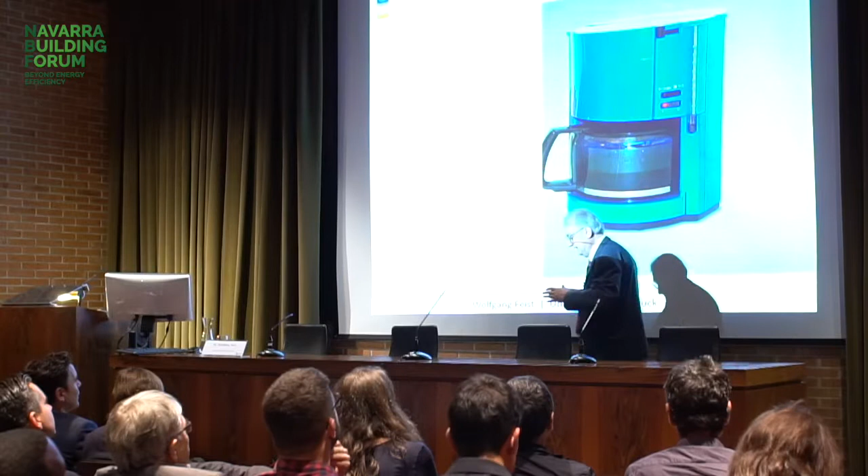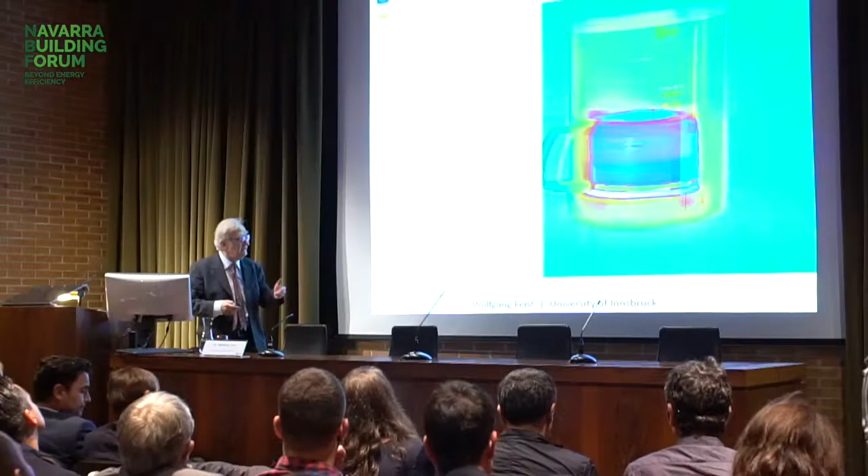Well, if you just have a can of coffee and you place it at some place, it doesn't stay hot very long. It will lose heat. So then there was a clever engineer, of course, who said, well, if we just replenish the heat which is lost, we can keep the coffee hot. And that's a typical engineering solution for that. And this is what you see if you look at that can in infrared light. So you see all these losses, and you also see that we have energy in the form of heat supplied to the pot so that it's kept hot.

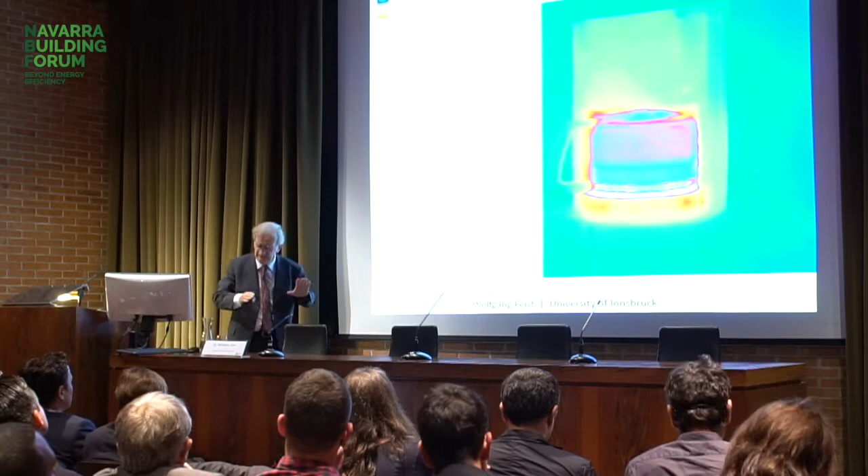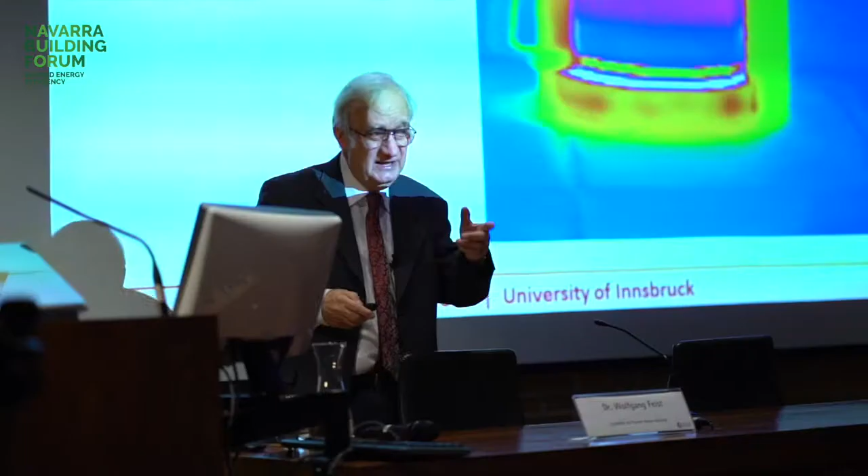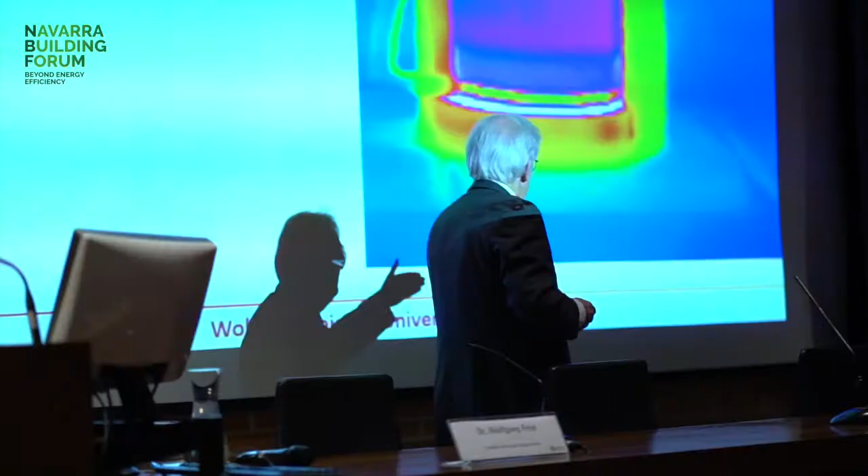Now that's a typical way we do our energy business almost everywhere. My original profession is physics, so we analyzed at a certain point the energy use in our society, and I can tell you about 98% of the energy use in our society is of this kind. And there is a way to do it completely without losing a lot of energy, and you all know about that. That's the passive way.

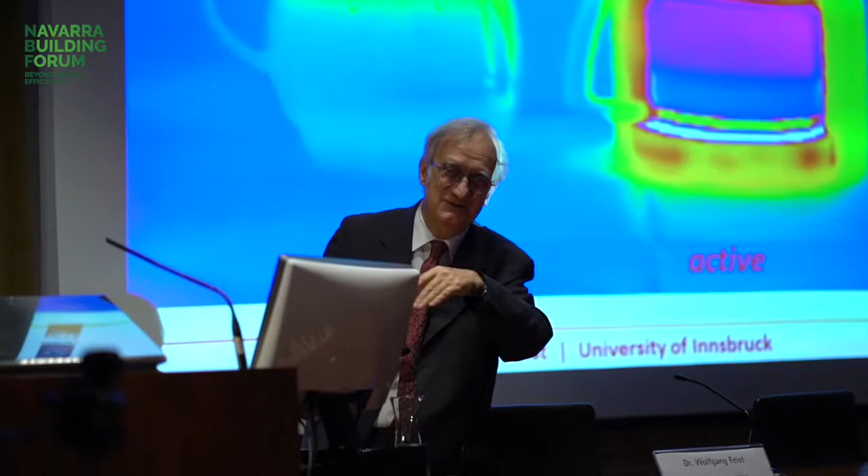You fill the coffee into the thermos bottle, and it will be hot for 6 hours, 8 hours, 10 hours. It's a good thermos bottle, and you don't need any energy to keep it hot. So in order to keep something hot, you don't need to add energy all the time. You only need to add that amount of energy which is lost by the system. That's simple physics. And the same thing applies vice versa for cooling. You can think about it, I won't go into details right now. So that is the basic background explaining what a passive house is. It's a solution for the energy service heating or cooling without a need to spend a lot of energy.

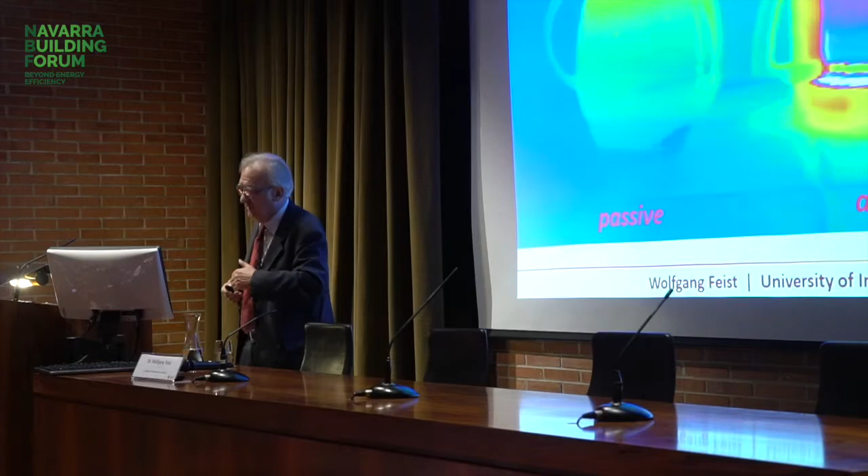Now, from a viewpoint of physics, you can improve the efficiency as much as you want. You really could improve it so that at the end you won't need almost any energy to heat the building. But at that point it's also an economic question. Some winters are a little bit colder and others are not that cold. So you would have to construct the building for the very coldest winter, and maybe it's only 1 hour every 10 years where this very high efficiency would be needed. From a point of economy, that wouldn't be a good idea.

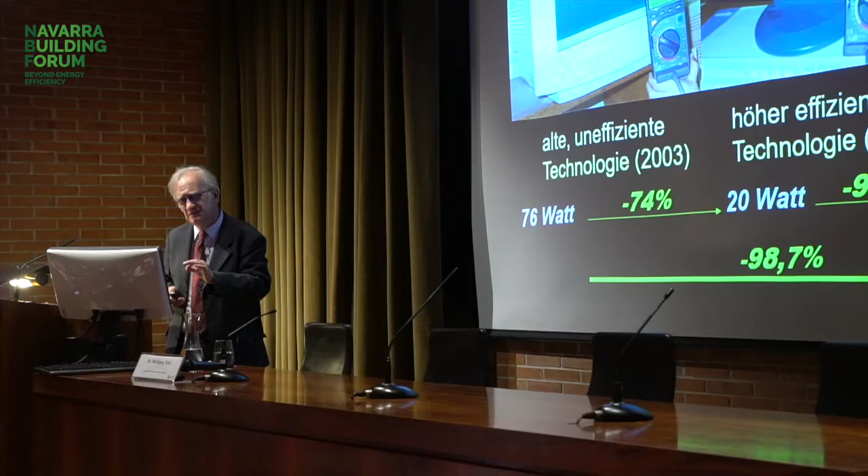Because we have some energy available, I will talk about that later also. So it's always a question how far we want to go with these passive measures. But it's not the only part. I already told you that 98% of the energy use we have is of this kind. And then you might get very skeptical and say, oh, is that true? Well, let me just tell you another example. We would have to do it example by example, but let's just look at this example.

How many of you still remember this CRT monitor? Have used it in their lab or whatever? That's not so many, because a lot of young people are also here who have never known about this. So this consumes about 76 watts, that is the measurement here, in order to have a decent display available.

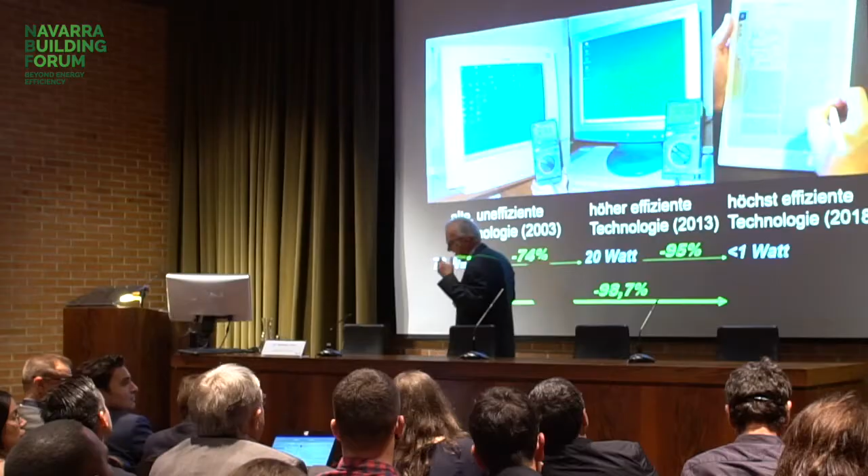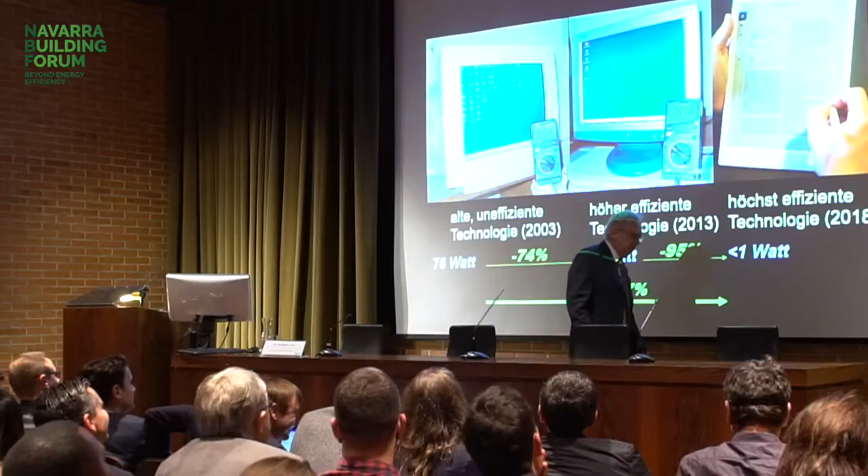And at the time, it's not so far ago, 2003, I discussed it with the engineers in that industry. They were to improve the energy efficiency of these monitors. And then they told me, oh, well, this is not possible. It's impossible because of the laws of physics. Now, I'm a physicist. I know about the laws of physics. From the laws of physics, almost nothing is impossible besides going faster than the speed of light. But a lot of other things, they are not impossible. But they have good reasons to say.

They say, well, the electron beam, which is used to write on that screen, has a kinetic energy, and it's not worth it to recover the kinetic energy of that beam. And that's clear. That's one of the reasons why you have this very high amount of energy being delivered to that monitor. And that was also the reason why, do you remember, these things got really hot. So they were heating your office all the time, also in summer when you didn't need it. So that is why this is old, inefficient technology, which is not used any longer.

Or is anybody still using CRT monitors? Interesting. Interestingly, this is what the guy didn't believe me. We had the better efficient technology.

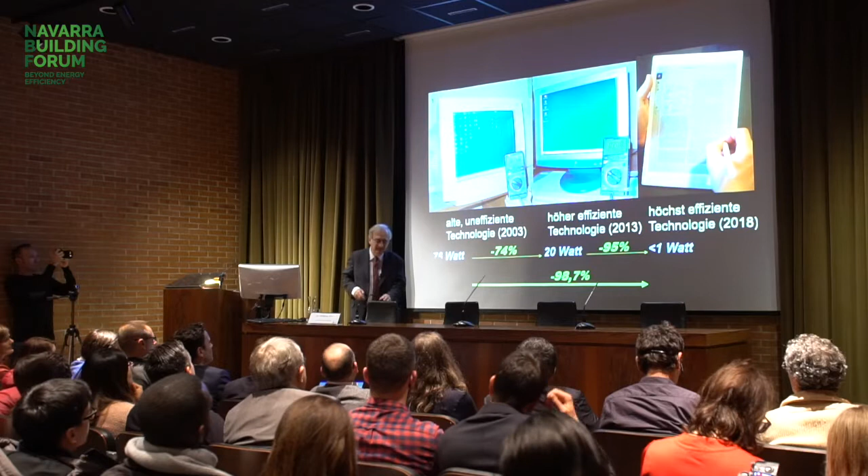Nowadays, almost everywhere, we have these LCD displays, which are based on a completely different way of displaying what you want to see on the screen. And the energy you need here is just 20 watts. So that's a reduction of 74%. Did you know that? It's quite a high reduction. It's only 1/4 of the energy these kinds of monitors use compared to the old ones. But let me tell you, it's still much too much. Still much too much. How much energy do we need to run this display?

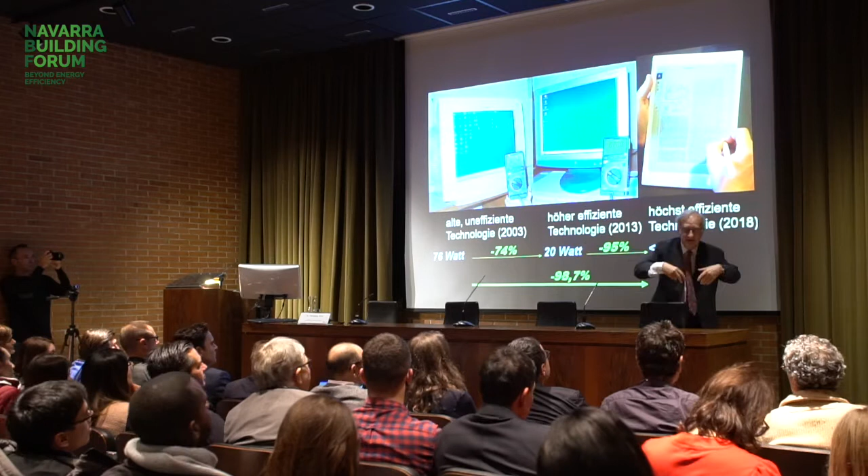Zero. It's like the thermos model. You don't need any extra energy besides the light coming to that display in order to display something. Now, some people say, well, that's not possible because we want to have moving pictures like a movie or video. It's possible. And you see, it is an already available technology, and some of you might already have that kind of technology. It's called electronic ink or electronic paper. And it doesn't consume any energy to have that display. It consumes a little bit for changing the display, but it's measurable. It's a range of less than 1 watt. It's available, it's possible to do that. And from a point of physics, it's no problem.

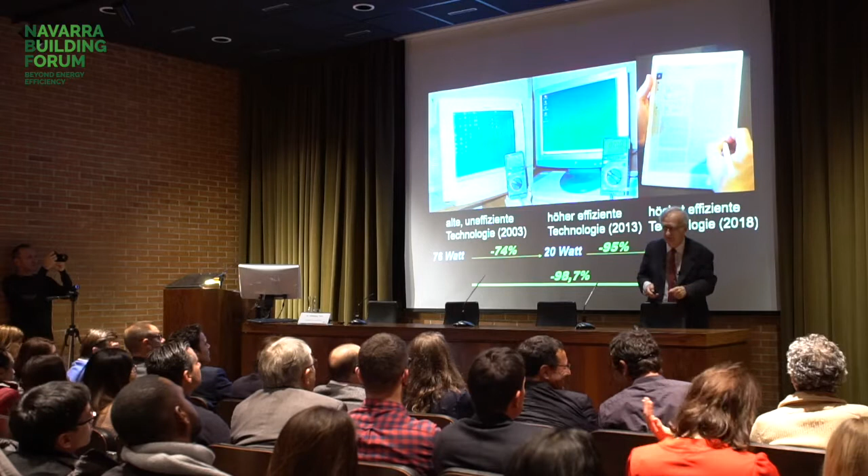So now, why aren't we using these kinds of monitors everywhere? That's a question I want to give you. Maybe we come back to that later on. And I promise you, it will be not so far in the future, we will be using these kinds of monitors almost everywhere. So that's again showing you the question of providing energy services, displaying something on the screen. For these kinds of energy services, from the very nature of the energy service, you don't need energy to provide that service. Or to put it another way, the amount of energy you need can be very, very low, extremely low. And that's all about this development of increasing energy efficiency.

We have it also with cars. That's an example of a very energy efficient car. Maybe some of you remember, that was 2002, it's quite far ago. It's a car which consumed only 1/5 of the energy which a normal conventional car consumes. And it's interesting, it was VW who built that car, but they didn't decide to bring it to the market. It's quite interesting. Why didn't they decide to do that? Maybe they wouldn't be in such trouble as they are right now if they had made that decision. That's another question again. So, yes, we have these technologies available, and sometimes there's a question, why don't we use them?

Well, in the case of buildings, we have been doing this. It's also a question why. Well, the answer is quite simple. That is because in the building industry, there are a lot of small and medium enterprises, well, also big ones, but a lot of small and medium enterprises. And you always find somebody who will help you to realize such a thing.

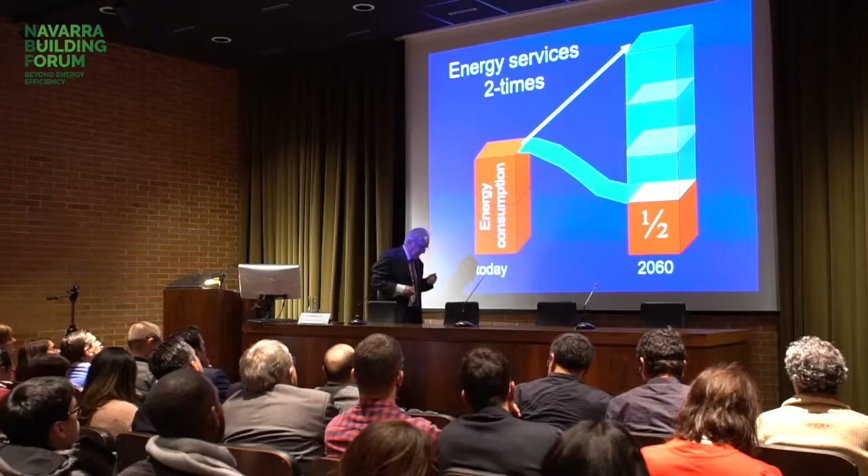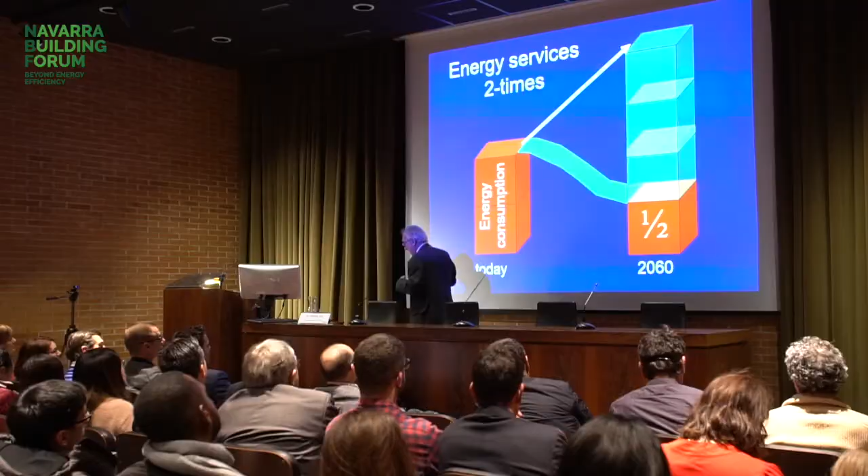Now there's a question we might discuss later on: if that was going on all the time, why did we still consume more and more energy? We'll come back to that later. So the basic idea for the solution of the energy crisis we are in right now is that we improve efficiency by at least a factor 4. This is a famous book by my colleague Ernst Ulrich von Weizsäcker. I would recommend, if you haven't yet, reading that book called Factor 4, or the latest edition, Factor 5. We reduce the amount of energy we need for the same energy service by a factor 4 or 5. So this is what is maybe needed for the world.

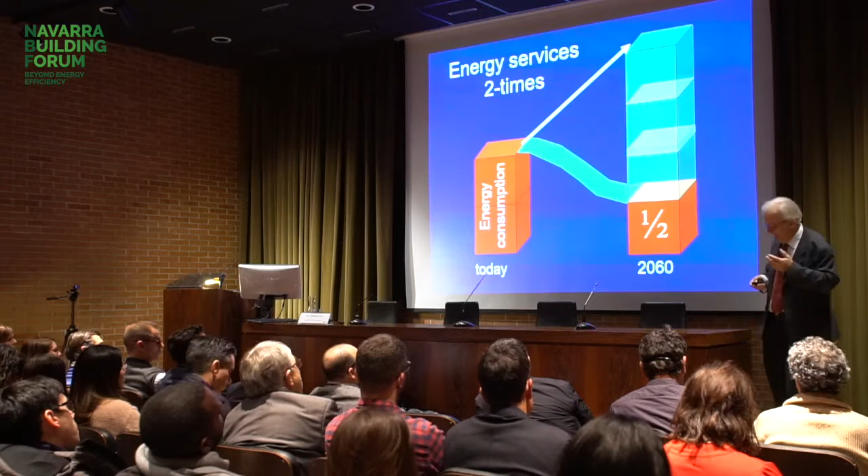We come back to that later on. But at the end, if we improve the efficiency by that factor of 4 or 5, the total amount of energy we need will only be half of what we need now. And that can easily be provided by a sustainable way of energy generation. So that's the main idea behind that whole process.

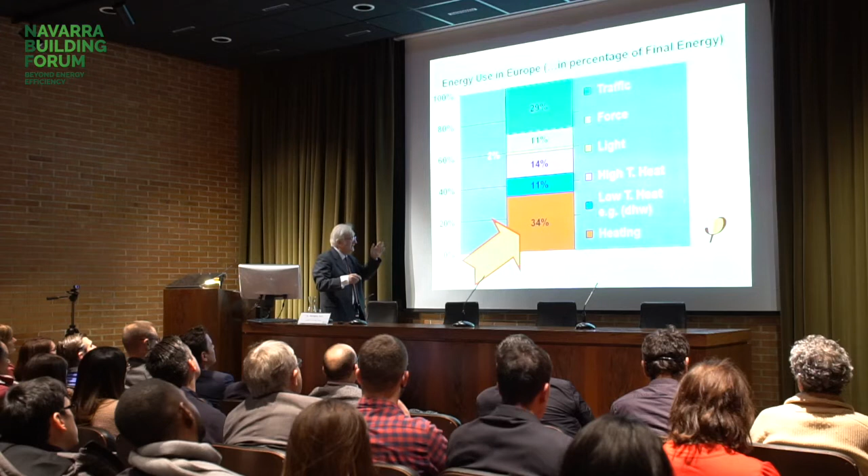Now the buildings are quite important in that, and that's another thing which is not so well known. In the countries of the European Union, about 1/3 of the total energy consumed is consumed by heating of buildings. Well, the light isn't that much. Traffic is also quite high. Maybe this slide is 3 or 4 years old.

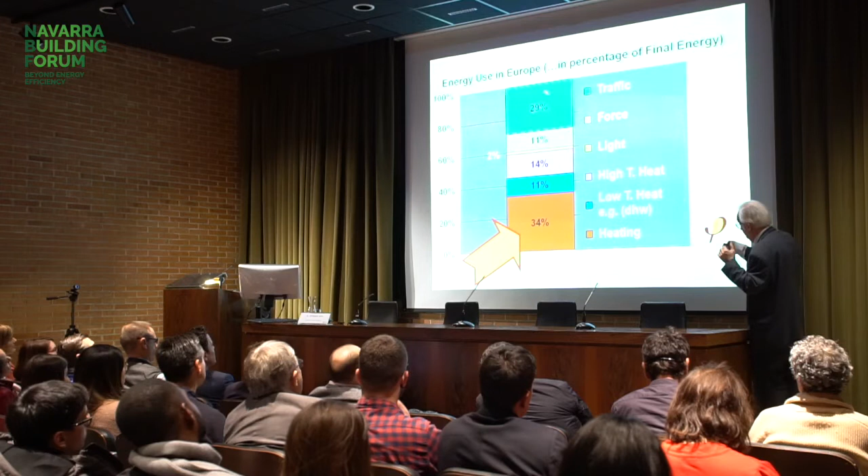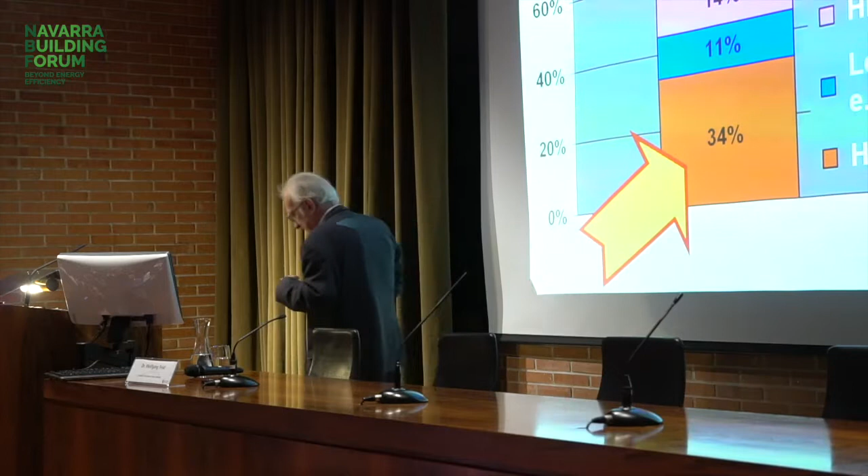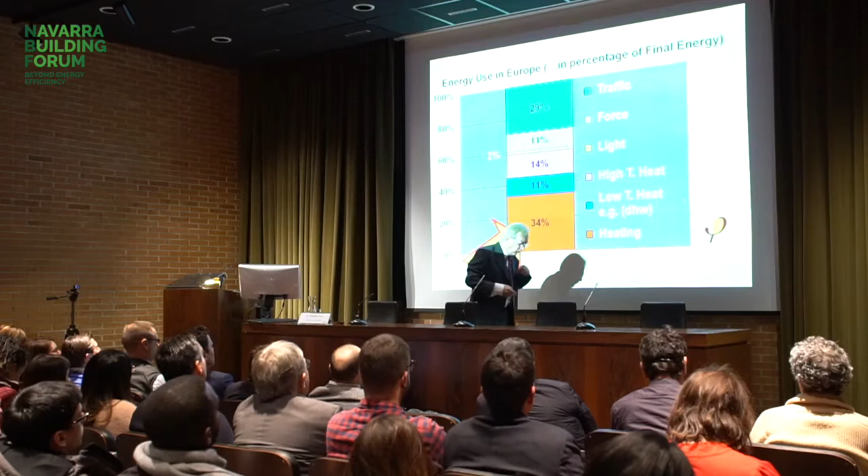Maybe now the traffic has grown into the same amount, and maybe the heating is already a little bit declined because we are quite successful in reducing that heating energy demand. But if you break down the energy consumption in the European Union, it's the biggest part of the overall energy consumption. So it's important to do something about the energy efficiency for heating.

Now, this is what we can do with the passive house. What you see on the left-hand side, that's an average building in the building stock in Germany. It consumes in the range of 15 liters of heating oil per square meter, or of natural gas per square meter a year. That's still the average in Germany. And we can reduce it by improved architecture, by improved components of a building by a factor of 10. So it's even more than that factor of 4 or 5 in the book of Ernst von Weizsäcker.

It's also important to see that with new construction, we'll really have to do this. We'll really have to be better than that factor 4. If we need a factor 4 on average for the reduction of the energy demand, you cannot just have a factor 4 for the applications which can easily do more. Because there are some applications where it's not that easy. Think, for example, about aviation.

We can reduce the energy demand for aviation, no question asked. But to reach a factor 4 within, say, 20 or 30 years, I'm not so sure that we will be able to do that. But in the buildings, we can do more. And this has been proven in practice. I'll show you some examples of the proof that it's really working. All the components you need to do that are already available on the market, not just in the laboratory.

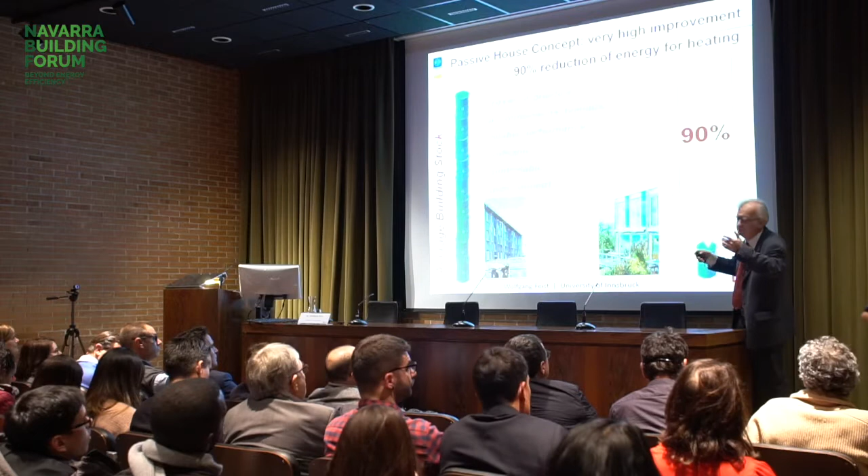Everybody can do it. But maybe that's one part of the problem, that a lot of people think, well, it's not interesting for me because I want something which is owned by me, so nobody else is allowed to do it. Competition sometimes is a good thing. If you have others who also can do that, it will improve the overall development. So now you might be curious how that is going to work, a factor 10 in efficiency with the buildings.

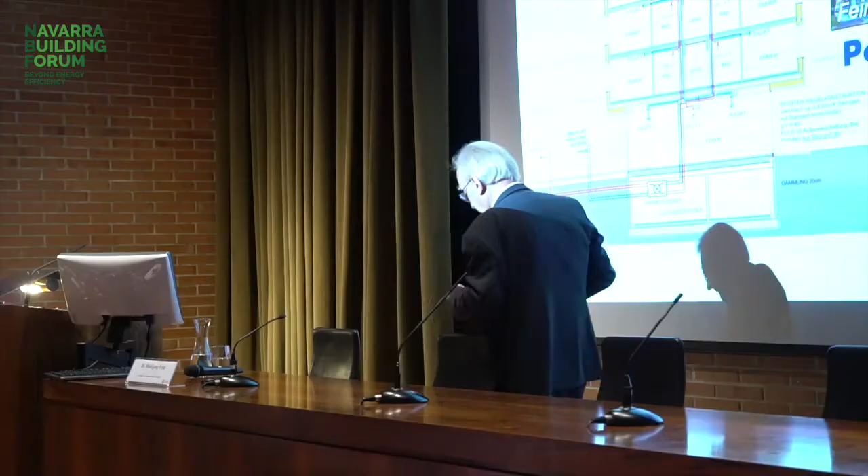And I'm going to use this example. That's a built university. We are at a university here. So this is a university building, a seminar building, which has been built by my friends, architects Feyer and Frankel from AAP Architects in Munich, in Vienna. And I'll use this example to show how it works. How can we achieve this very, very deep reduction of energy needed for heating?

And the next surprising thing there, or maybe some people would say the boring thing, but it is really boring. It's just the measures which you would think you do. It's the same thing as keeping the coffee hot. So if we want to have the building kept at comfortable temperatures, the problem is that you lose energy. Because of the temperature outside in Central European climate, but also here in Navarra during winter season, we lose energy because it's warmer on the inside.

Why is it warmer on the inside? Because we want to feel comfortable. That's the reason why it's warmer on the inside. So that's an anthropological constant. We need at least, say, 20, 22 or 23 degrees in order to feel comfortable.

But when it's 3 degrees or 0 degrees on the outside, you will have, from elementary physics, a heat flow from the warmer part to the cooler part. That's elementary physics. And we can reduce that heat flow by better insulation. So I don't have to talk much more about that. You can learn about the details of insulation, how it works, which parts of insulation work better than others, and so on.

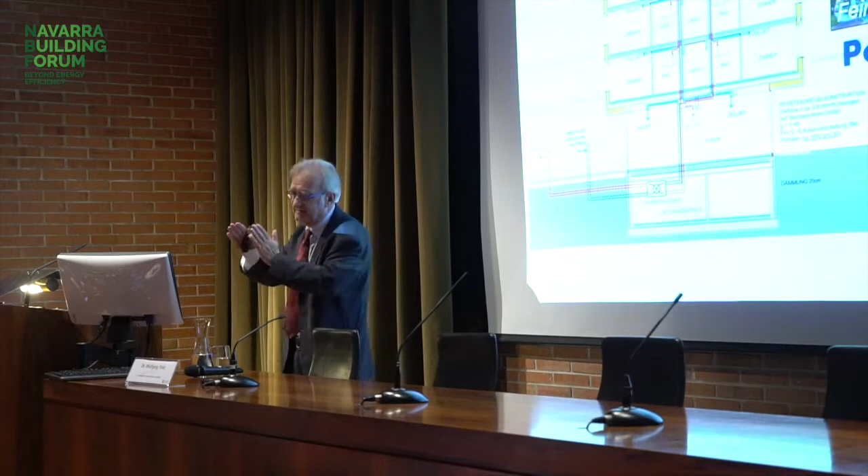Now, some people ask, why don't we just use a big cavity of air if the air is so good at insulating? Well, the problem with the air is it's also moving. So if you heat the air, you will have what is called natural convection. So we'll have all these convection loops all the time, and you still lose the energy. So this is what an insulation material is all about. It's about keeping the air from moving. That's all. So you need something to stop the air from moving. And it doesn't matter what it is. It could be any kind of material that stops the air moving.

Maybe it's a good idea that the material itself doesn't have a very high thermal conductivity. But what is most important is that it's not much material. That's the reason why these insulation panels are so lightweight, because it's mostly air. So it's just air which is kept in a way that it's not moving. And that's the very first thing we need to do, improve the insulation. I won't go into detail on that.

By the way, this is also good for summer comfort. It's also insulating if it's hot on the outside and you want to keep it cool on the inside. This is how you can use thermos bottles also. In summertime, you just fill in cold tea, some pieces of ice, and it will be kept cool. So insulation is not heating the building, and it's also not cooling the building. Insulation is just separating the uncomfortable outside situation, whether it's hot or cold, from the comfortable inside situation, where you keep comfortable temperatures. That is why insulation is always good for reducing the amount of energy you need.

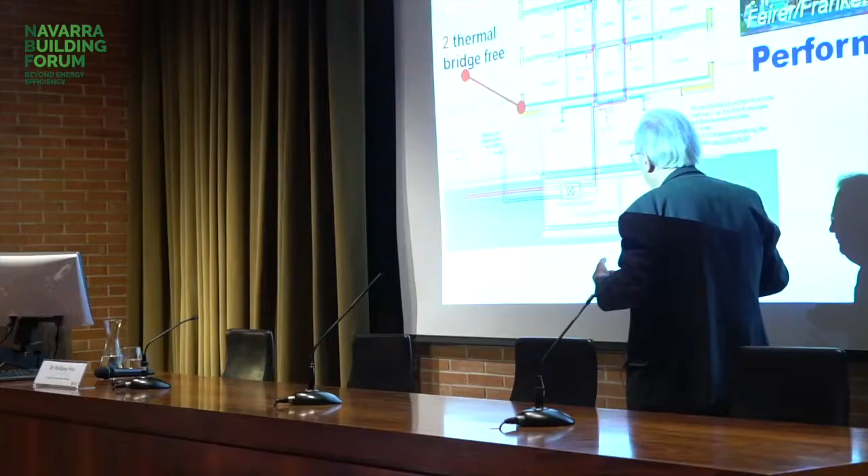So next step, we want to do that insulation in a proper way. That is, not having any points where there is less than necessary insulation. We call those thermal bridges. We want to reduce these thermal bridges. Next thing is, of course, windows. They have some influence, so we need improved windows. I'll come back to that later on. One other step I will be talking about tomorrow in a presentation: it has to be airtight. It's simple. I don't have to explain why it has to be airtight.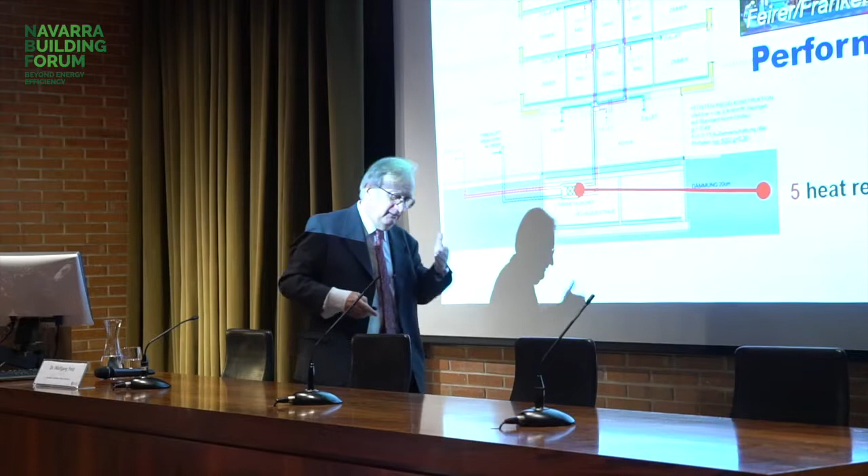And then on the other side, of course, in a building we are living in, we need fresh air. So what to do if it's airtight and we still need fresh air? Well, we provide that air. We have external air in our environment here in Europe; we're quite happy. The external air has, in almost any circumstances, a better quality than inside air, because the pollutants are inside the building. So you want to remove the stale air from the inside and bring in fresh air from the outside.

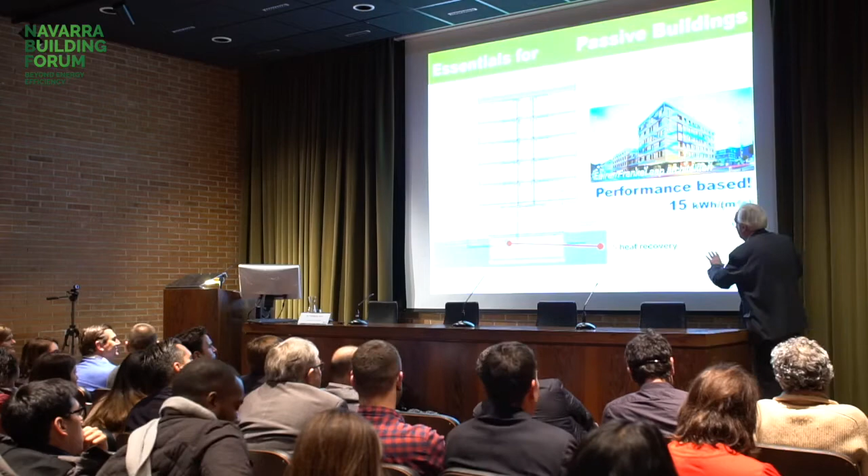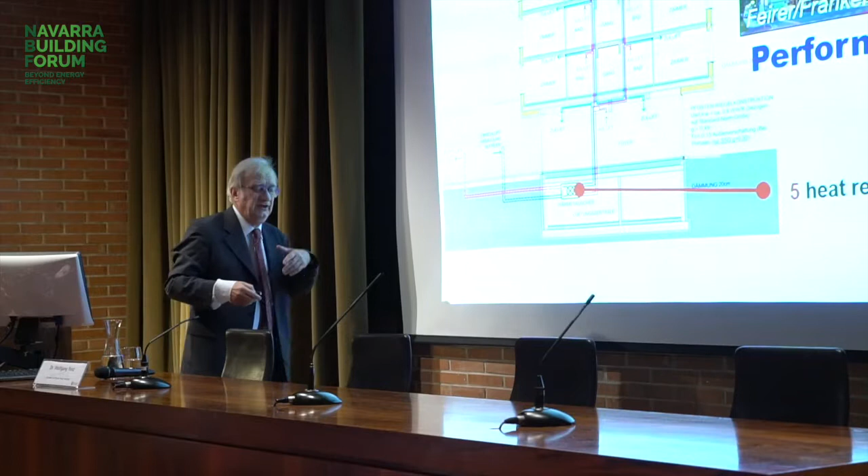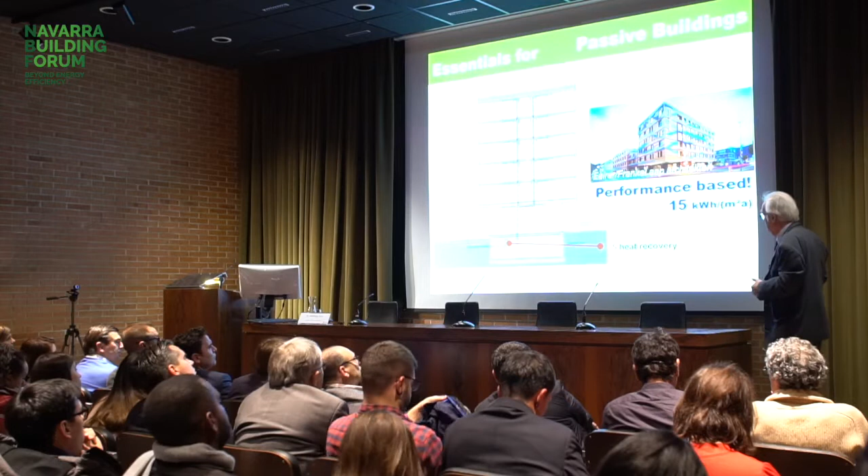Now that's not completely true in some places in China. You all know. And I won't talk about that right now. It's also something interesting, and we have done some research on that, but let's just assume for the moment that the external air is healthy air. So we bring it in, and then we would still have cold air coming into the building. Well, we use heat recovery, so that's why the heat recovery system comes in. So these are the 5 steps how to build passive houses in winter cold climates, like yours here or ours in Central Europe, and a lot of climates in the world are winter cold climates.

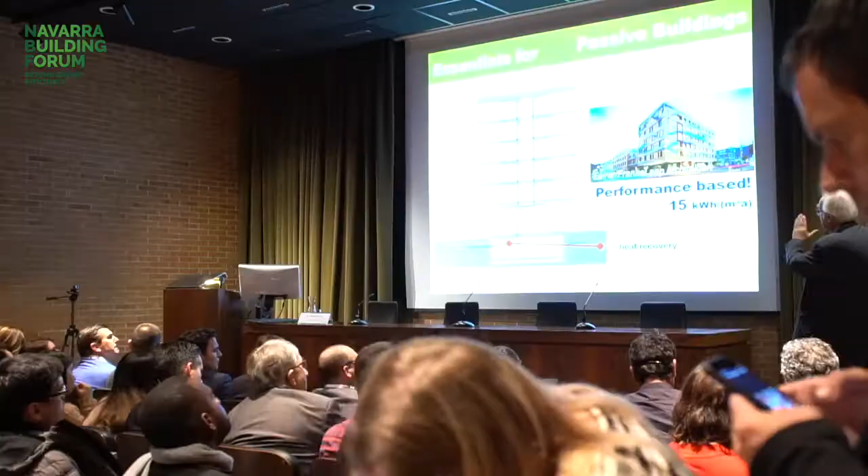Well, if it comes to summer hot or especially summer humid climates, there are some extra measures which are also important, and we could talk about it, but I won't do now because I don't want to talk more than 3/4 of an hour.

Well, now the next question that comes up then is, well, it's expensive. What does it cost? And I'm not going through that whole calculation right now. I'll just show you that improving the insulation at the end will result in much lower total costs than providing the energy from any kind of source we have nowadays. It doesn't depend on what kind of source you try to use. So improving the insulation, but of course there are some costs for improving the insulation, and these costs have to be financed. So how do you finance these kinds of costs?

Well, what you normally do, you go to the bank and you try to get some loan from the bank, and then they will give you an interest rate. You have to calculate what you will pay on an annual basis each year again for that loan. And we can calculate that and compare that with the alternative, and the alternative is to just pay for the heat. And then at the end, if you look at the difference, it's profitable. So yeah, this is a profitable way to save a lot of energy.

So let's come to the windows. What you see on the left-hand side, that's a typical conventional window, like we have had for a couple of decades now. But even earlier, it's also a history. Even earlier, there has been only single glazing used and much less sophisticated window frames. But I don't know who had that very bad idea to use the timber in the way you see here, because that gives you a very thick part of the window frame here. So you have only a small part of the transparent area of the window.

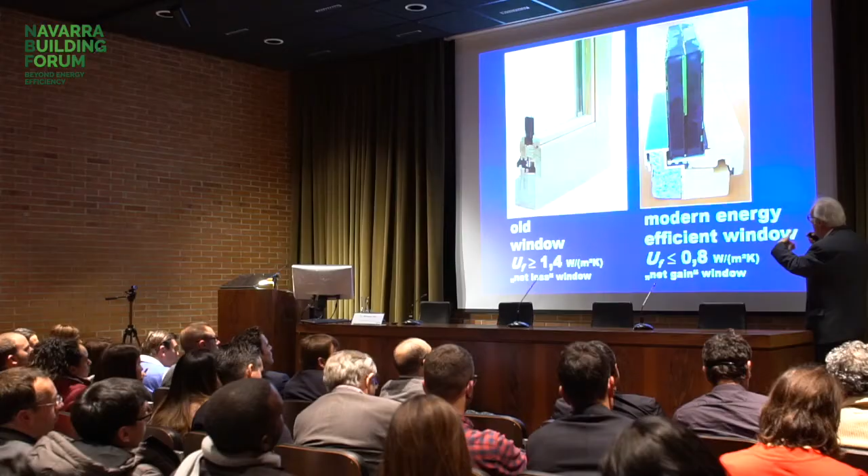That's the important part of why we build windows. Because we want to have a transparent part. We want to have an aperture. You want to look out, or you want to see the sun, or you want to have the sunshine coming in, or the light coming in. So yes, that's the first thing. Just have the frame 90 degrees changed, like you see here. So there's less area covered by the frame. Add another window pane. Now again, we have two spaces. In this situation, it won't be air. It will be a noble gas, argon normally, what we put in.

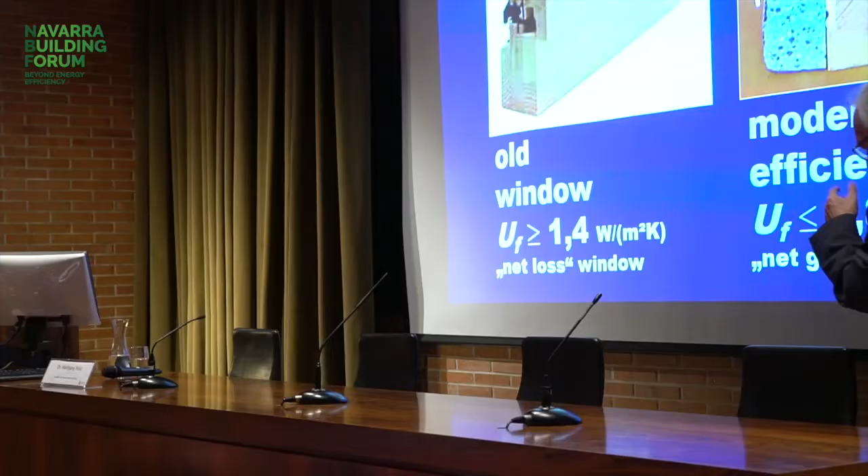And the latest technology here is to use a so-called low emissivity coating. That's an interesting technological development. I know the two guys who did that development in the early 70s in the last century. It's quite interesting to see that application. It's something we also do in the thermos bottle. That's what you normally do nowadays with windows. And now we can reduce the overall heat loss coefficient of a window from 1.4 to less than 0.8. That's what these improved windows do.

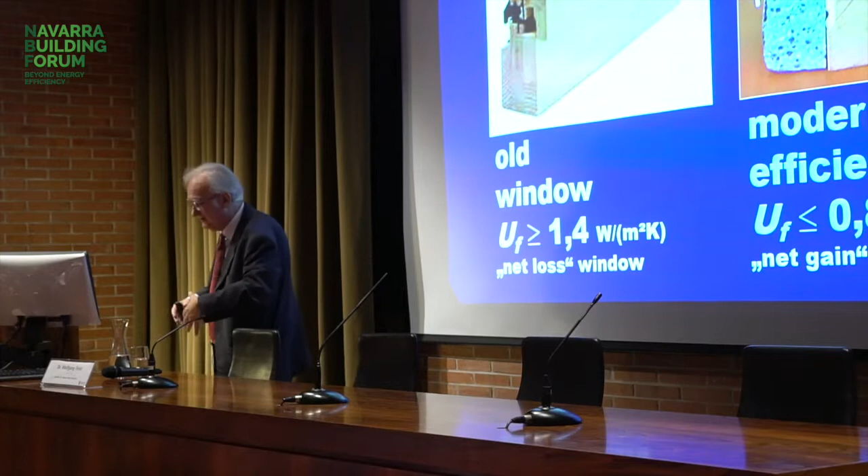Now, somebody might think, no, that's not so much. It's not that factor 10 we have in insulation. Well, but in fact, it's even more because the window also gains solar energy. So if you look at the heating demand, you get a solar gain from the window. And these solar gains are higher than the losses you have with that type of window, at least in the climate we are in here during winter. During summer they are also higher here. That's a problem of overheating during summer, that you have a lot of solar gains, so that's where the shading comes in.

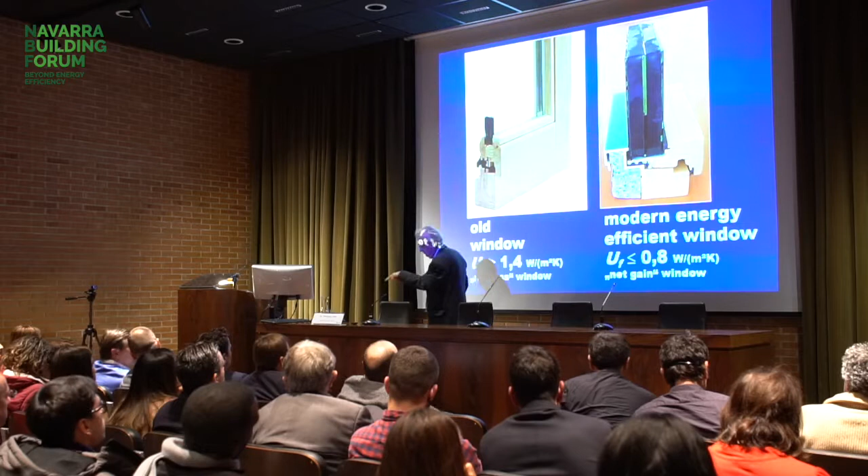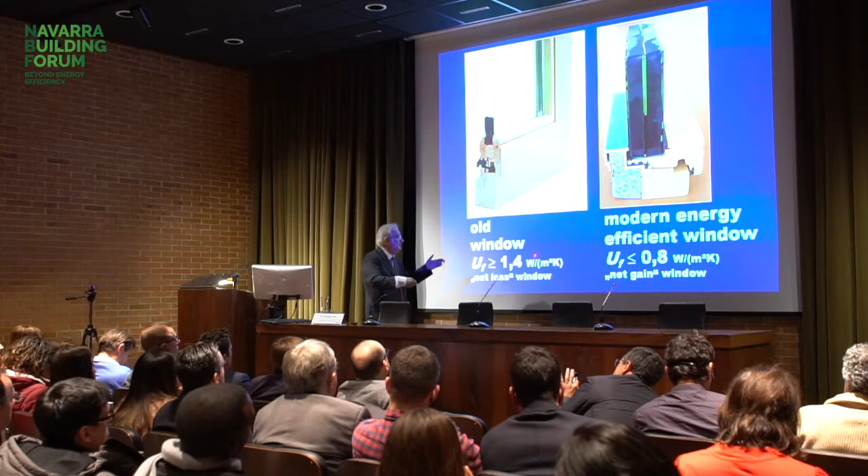But with these windows, we get a net gain in your climate here, or also in the climate of Central Europe. You get a net gain also in winter. So the overall energy savings we have going from the old windows to the new windows is also more than a factor 10. It's going from a net loss window to a net gain window.

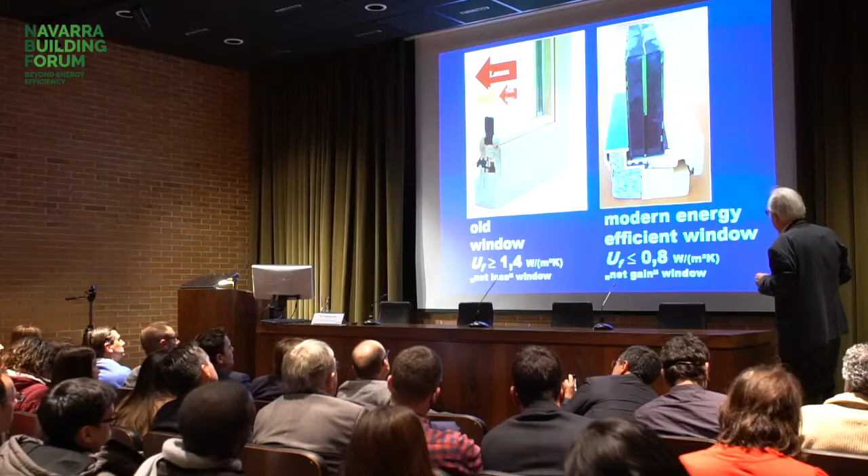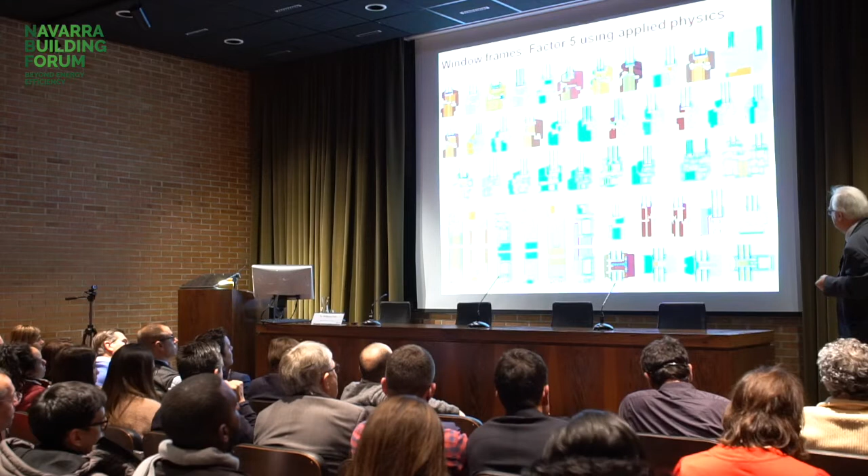It can be small and medium enterprises who produce these types of windows, and it can be all types of windows. It can be aluminum windows, plastic windows, wooden windows, some with extra insulation. Others just use air spaces for the insulation, and so on. So lots of solutions in order to reduce the energy loss of a window frame. It can be done by small and medium enterprises. Also doors, so it's available on most of them.

efficient ventilation? Well, a heat exchanger is a very simple thing to have. It's very easy to understand how such a heat exchanger works. You have the extract air, which is still warm. I don't want to confuse you, but you also might think about the summer situation where this air is cooler than the outside air, and the recovery system will also work. So let's think about warm extract air coming from the kitchen or from the bathroom, and we have fresh air from the outside, which is cold.

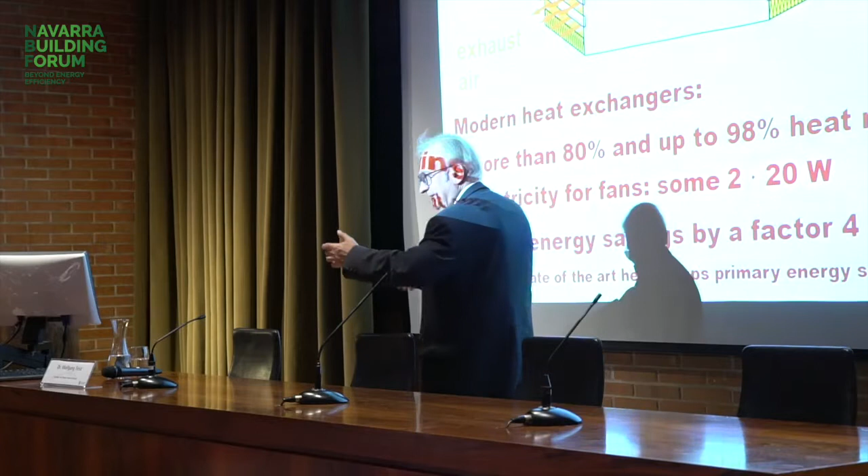So now what we do is quite simple. We have the extract air, the warm air, going through that channel up here. And in counterflow, we have the fresh air going through the other channel, which is completely separated. Then we will have heat flow between the warmer side and the cooler side, and we will regain most of the energy. It can be up to 98%, or even more. It's just a question of the area you use for the heat recovery, and that's again an economic question. If the heat exchanger were as thick as this room, it's not economically interesting.

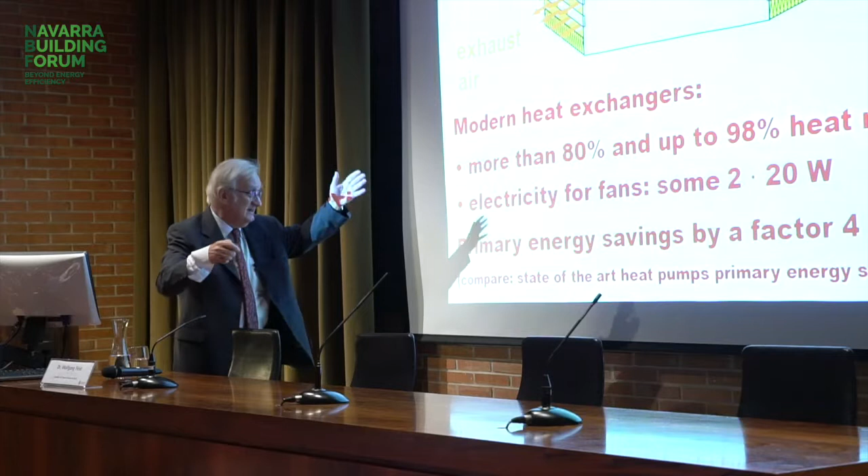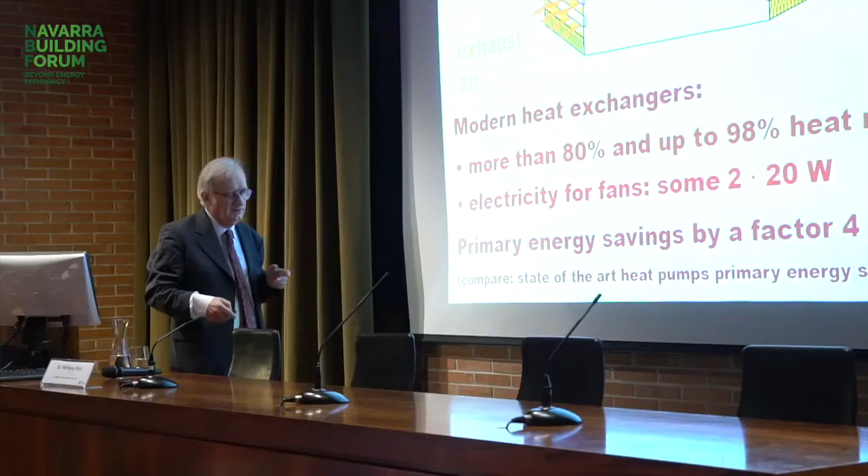Most of the heat exchangers we use now are in the range of 82 to 88%. That's the range where you get decent sizes of these heat recovery systems. And that means that you recover more than a factor 5 of the energy which gets lost otherwise. Then there is always the question, well, now you have to move the air. Yes, you need some fans, and the fans need energy to operate. But the energy we need to operate a fan nowadays is very low, about 1/10 of what you would need for heating the air. So it's better to move air than to heat air.

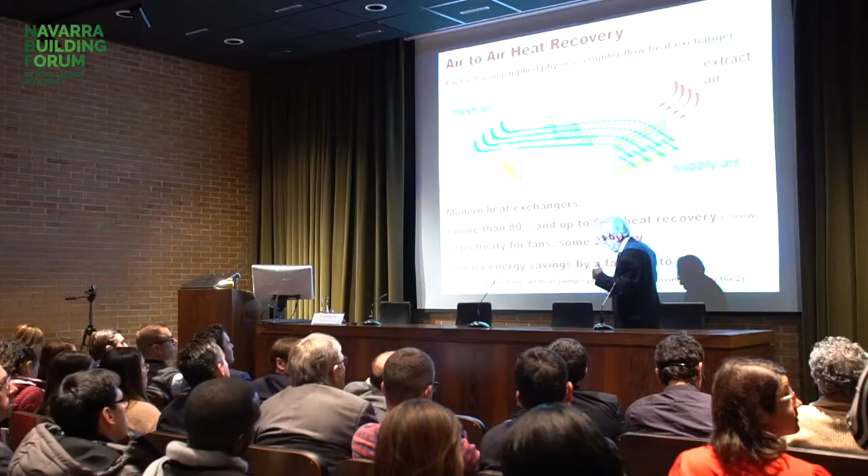Now of course the electricity has to be produced, and if you produce it in a non-sustainable way, which is still how most electricity is produced, it will still reduce the primary energy by a factor 4 to 6. So that's how these heat recovery systems work.

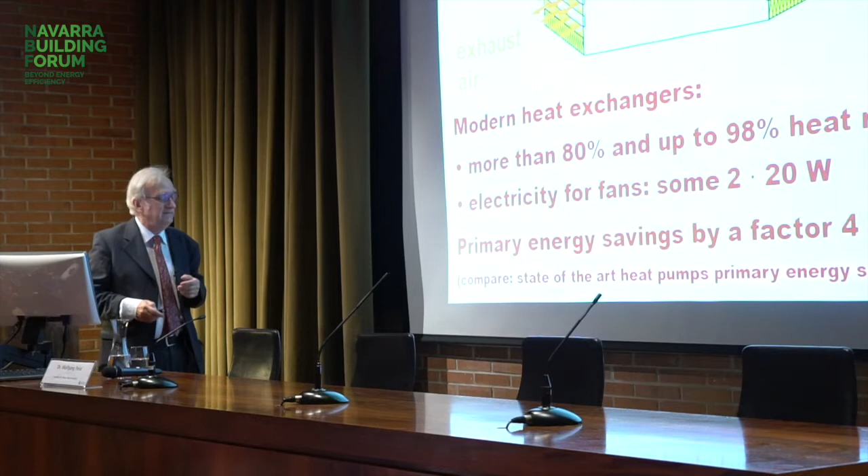So that was part of a 4-dwelling experimental building we built in 1991. I already talked about that. It's now almost 30 years old, and we did some research on the longevity of the components in that building. I won't talk about that again because I just want to give you some ideas of what you can do. But after 25 years, we added some photovoltaics. At the time we built that house, photovoltaics was still quite expensive, so it was not worth investing in that kind of electricity generation. But that has changed. Now photovoltaics is an interesting way of producing renewable energy.

It may still be a little more expensive than the conventional way, but if you use the electricity efficiently, if you only use half of the electricity you normally use, it's worth it. So we added some photovoltaic panels, and that makes it possible to have a building which produces more electricity than it uses. That is what is often called a net zero building. Now, from a scientific point of view, this concept of net zero is only interesting in the first phase of the development.

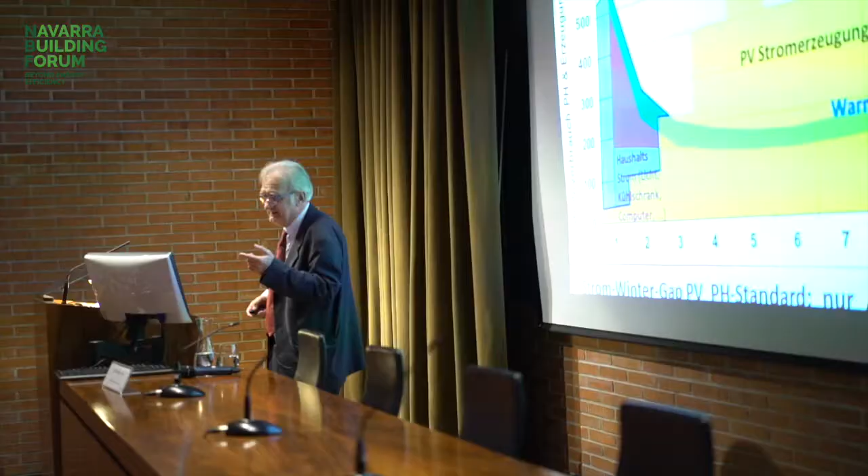We produce much more electricity than we use, even if you add up all these parts. In the wintertime, the photovoltaics won't be enough to provide the electricity, even for the simple things like light and refrigerators, and not to speak about domestic hot water and heating. So this is what you see here. That's a problem of this net zero energy concept. It won't work at the end because you still will need some energy during the wintertime.

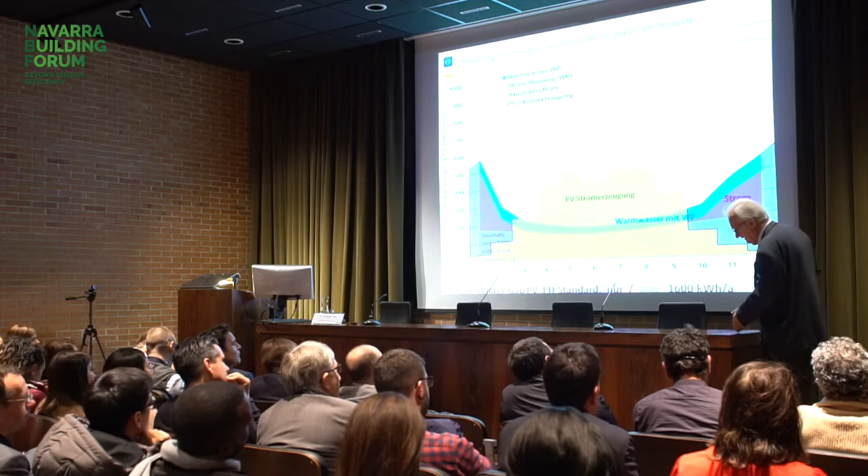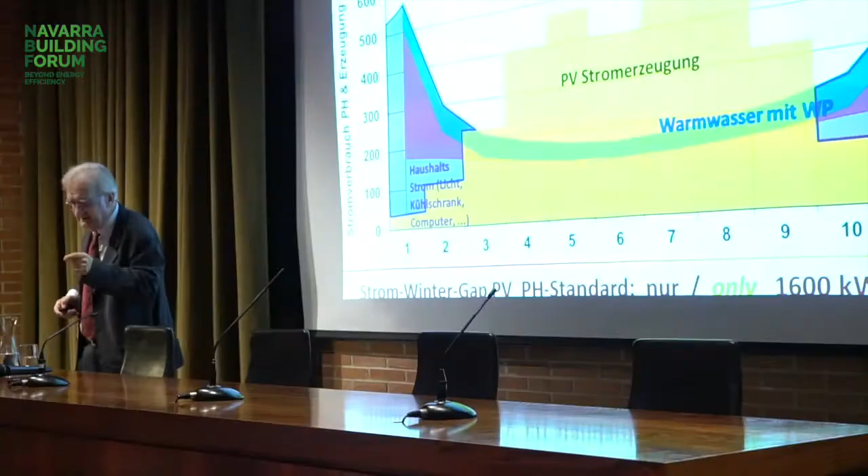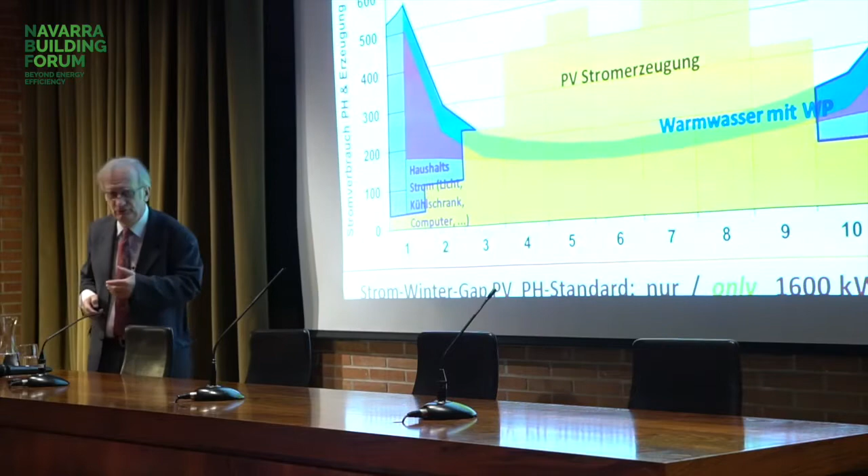Now some people think, well, we solve that with seasonal energy storage. I just say energy storage. And we make progress in energy storage. It's getting less expensive with each day, one could say. But when we normally talk about energy storage, we talk about things like domestic hot water tanks or batteries, which can easily give you energy storage for a few hours, 2 days, 3 days, even a week. And you will use them, if it's a week, 50 times in the year. So that is something you could do.

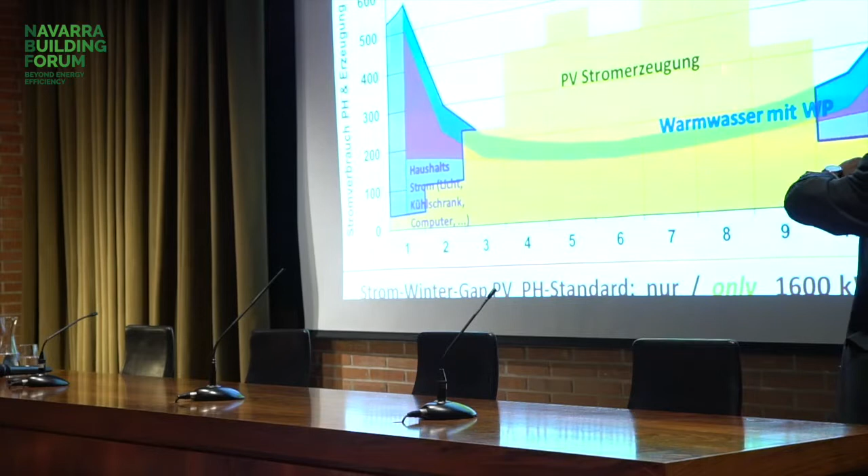This is also what you do with a battery in an electric car. You use it every day, so it's several hundred times a year. But now if you use that storage only once a year, this is what happens with seasonal energy storage. You can use the storage only once a year because there's no energy coming into the storage during all that time. So you have to store the energy during the summer, and you have to have it during the whole wintertime. And that's expensive.

It's clear. If you use a storage not 50 times a year, but only once a year, that's almost a factor 50 in cost. Well, we can't go too deep into that. There can be much deeper discussion about these things. Having seasonal energy storage is one of the still unsolved problems. It's in principle possible, and we can do that even though it's expensive, as long as it's not too much of the energy demand.

So with this very efficient building, it's just in the range of 5% of the ordinary purchased energy. So yes, that's possible to pay for. Maybe, this is just my opinion, in the future we will still use non-renewable energy for the small amount that we still will use, and maybe it would be less expensive and easier to remove the carbon dioxide at the end. But that's another question. In principle, we can do this as long as it's not too much.

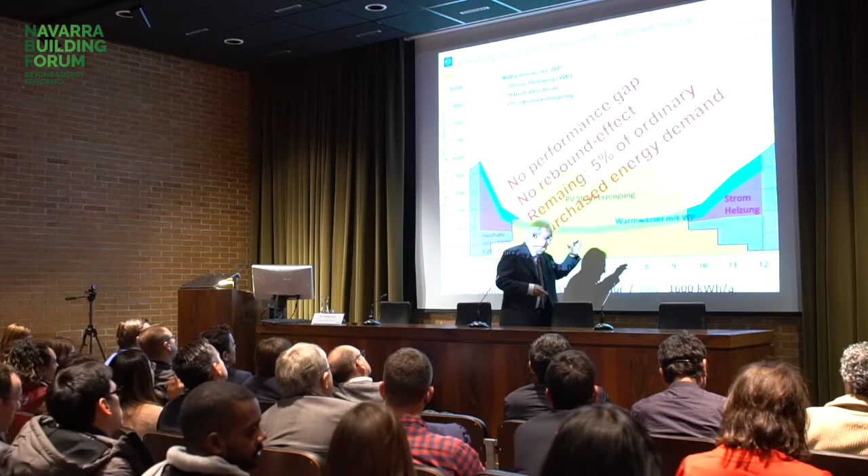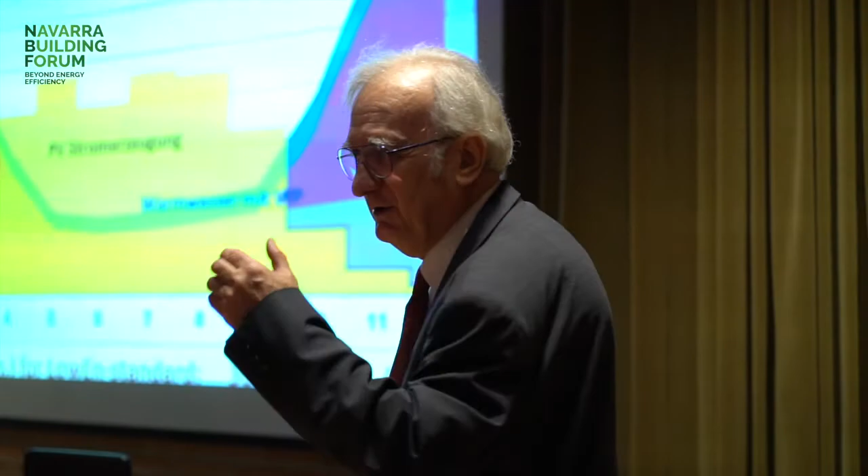But if we now go back to a less efficient construction, this is the comparison with the measurement results in the passive house. Let's remove the extra insulation, the heat recovery system, the triple pane windows and so on. That will be the remaining demand without all these things. And then the total energy you would need for seasonal storage is quite a huge amount. That would require quite a huge storage.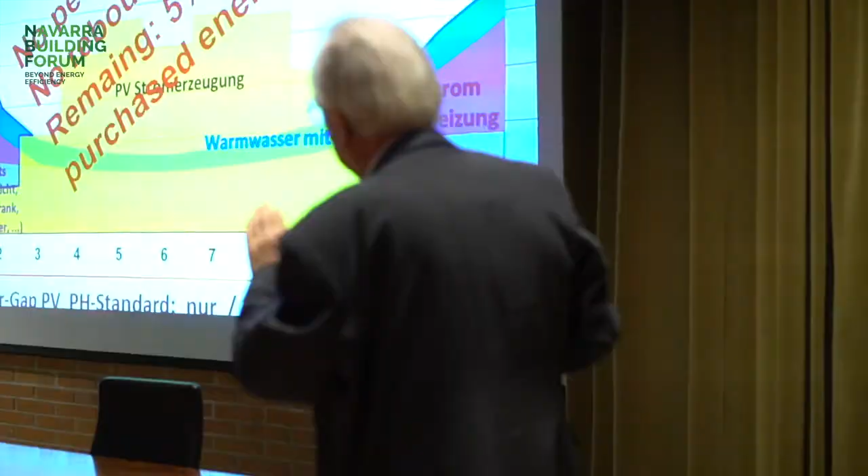That has been done. There are some research projects where we have equipped buildings with a 40 cubic meter hot water tank in order to provide seasonal heat. But you can imagine the implications on architecture if you want to do that. And of course, it's really, really expensive. So that's why using renewable energy fits very well together with improving energy efficiency. With improved energy efficiency, you can do 100% renewable energy, not just net, but 100% renewable energy.

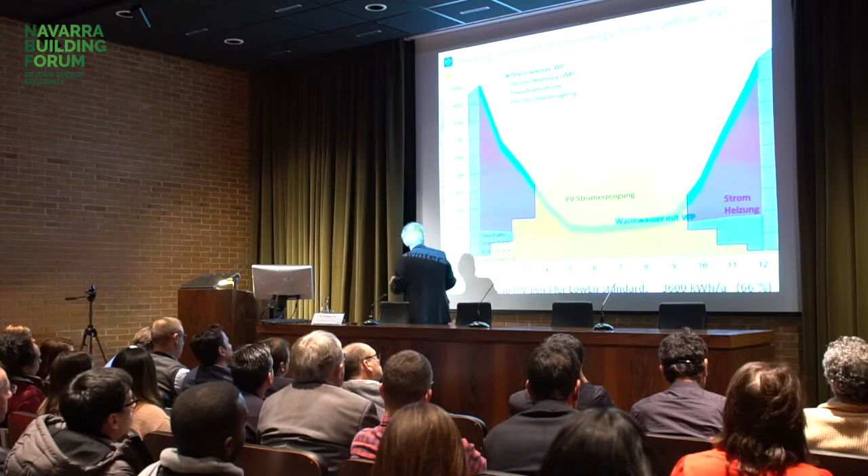Without the improved efficiency, you have that large gap during the winter where it's very, very expensive to have a seasonal storage. And again, this has already been realized. So this is an example from Germany where the city of Frankfurt has built this office building. There are some results also from that already available.

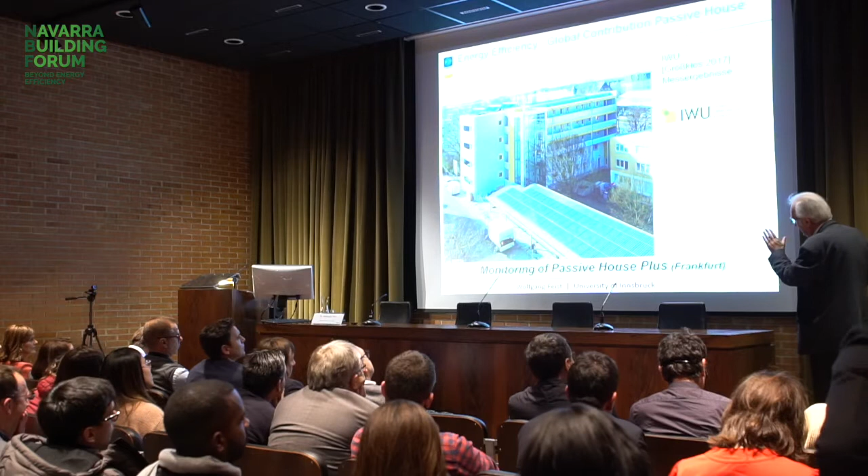Now you see, it's a very large photovoltaic panel. It's not only on the building, it's also on the garage. So one could discuss that. Well, in principle, it's possible to do so. What I think is a better idea is not to have that storage and these things in the building itself, but maybe that's something we will do with the energy provider, with the guys running the grid. It's maybe much less expensive, but it's possible to do that, and nowadays you could do it as long as it's very efficient.

Now let's come back to how that is going to help us solve the climate problem. What you see here is again measured values of the energy consumption in Germany. And this line here is the total primary energy consumption in Germany. That total primary energy consumption, beginning in 1990, or better, not to come into strange discussions, let's start in the year 2000, has been reduced during the last decades.

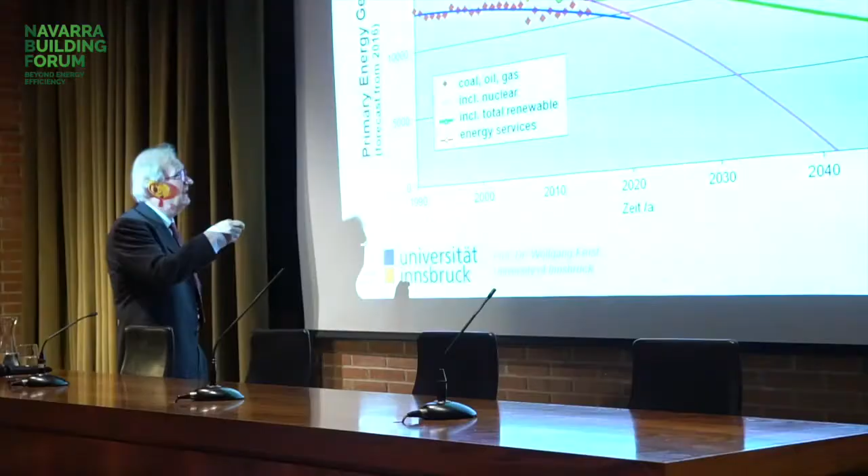And then we added also renewable energy. This is what you see here, the dark green part. Now the interesting thing, which you normally don't see, is that our energy services had been growing. So this is the overall growth of energy services measured in value. It's the economic growth. So all this economic growth in Germany was provided by improving the energy efficiency.

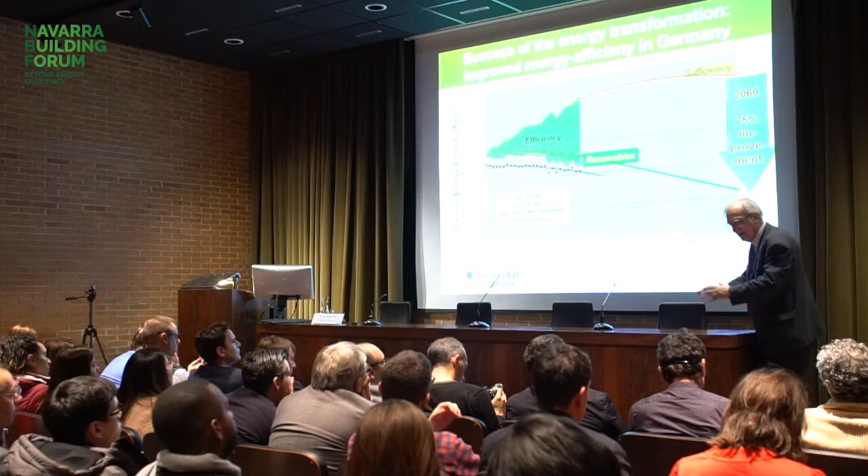And that economic growth was the reason why we had this prognosis of very large demand of energy. Some people thought that it's necessary to build 3 times the amount of nuclear reactors already existing in Germany, because the energy demand will rise that much.

Well, yes, the energy services have been going up, but the efficiency has been improved. And if we go on improving that efficiency, we can reduce the energy demand further and further. We can add additional renewables, and that's a way to finally get totally rid of the non-renewable part of the energy production.

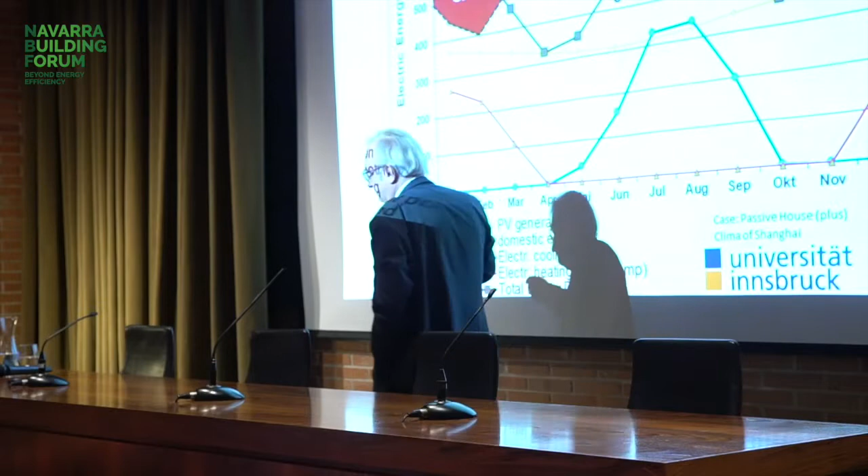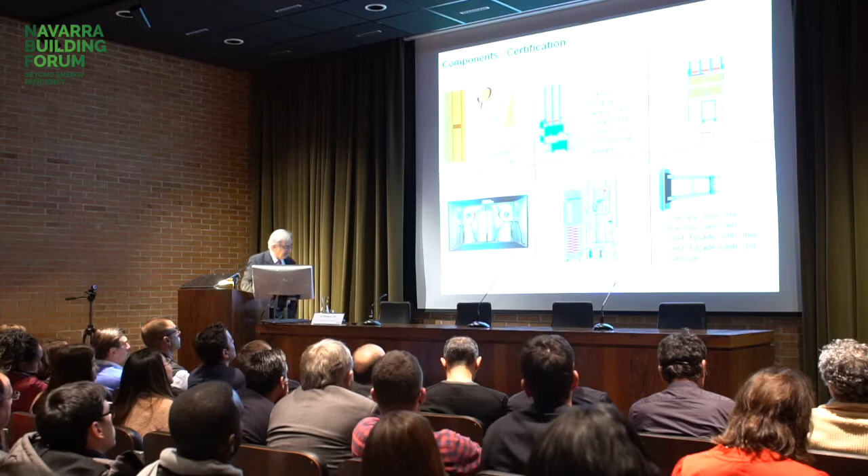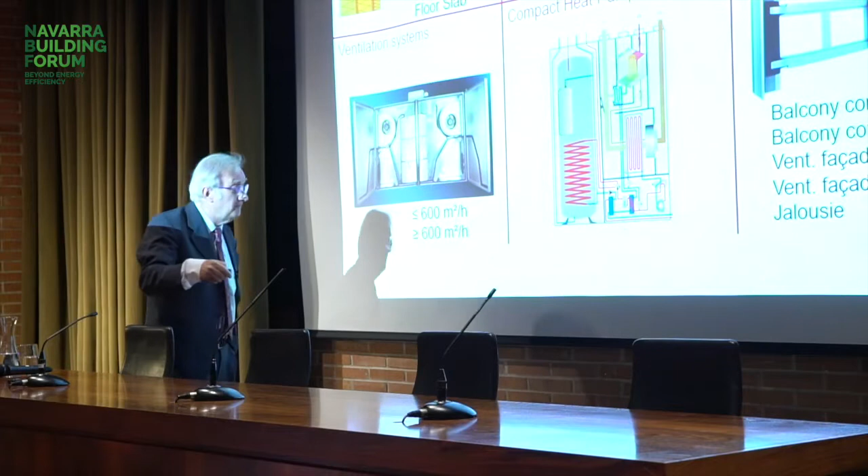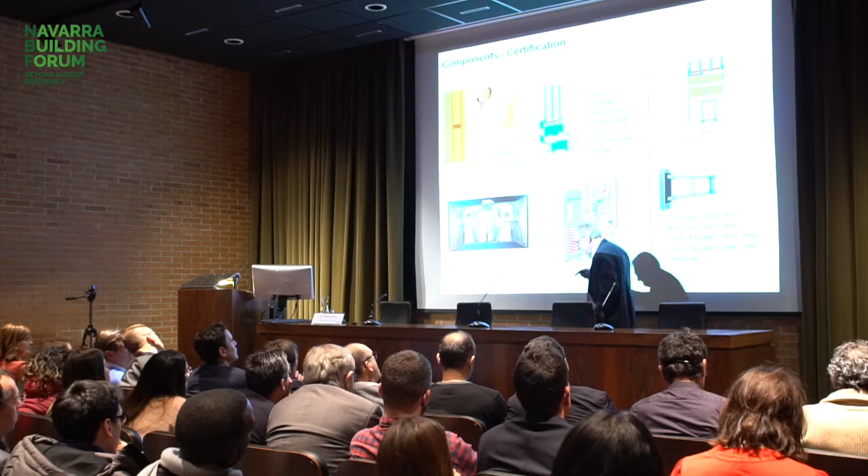So I'm stepping over that. It's an example of a passive house being built in China. These are some examples of other components. I have already talked about the window component. We have also components for the heat recovery systems and for the compact heat pump systems providing cooling, heating, and domestic hot water, and the ventilation, balcony separation parts, and these things. These are all developments which can help small and medium enterprises introduce energy efficient components to the general market. And that's been growing quite a lot in the past years.

What do we also do? We help architects and engineers in the design of a very energy efficient building. So we have this information freely available on the internet, but also provide courses about the passive house.

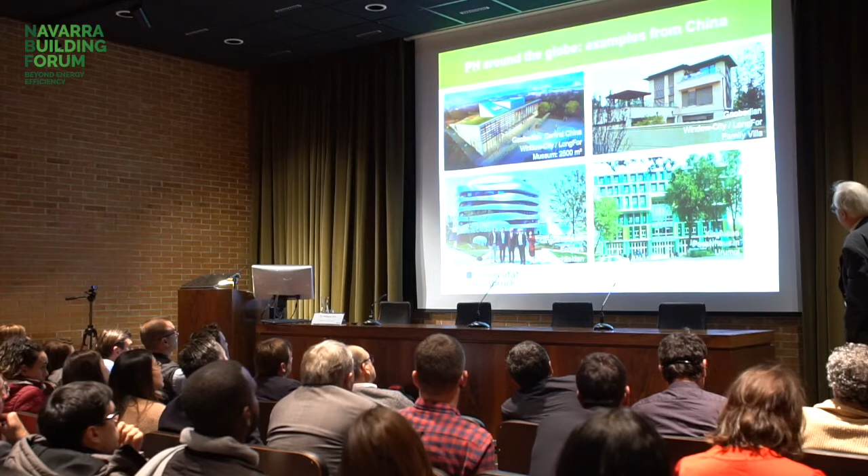Yes, that's a very important and interesting fact that with doing things like that, we don't just save energy, we can help in the development of these rural parts, especially here in China. These are some examples from Chinese developments. Their passive houses have been built, some of them with the help of European experts, others with original Chinese architects.

Some people say that in China they can't do really high quality. I don't agree with that. They can do it, and we have seen that. This is one of the latest examples. Well, you will see a lot of very high-rise buildings in China nowadays. Most of them are not energy efficient, so that's a big problem. Well, the hope is that at least some of the governments have realized that will create a future problem.

So this is one of the first passive house developments in China. That's 1 million square meters of passive house already completed. This is not a model, it's already completed. It was completed this year, and it was possible to visit during the last International Passive House Conference.

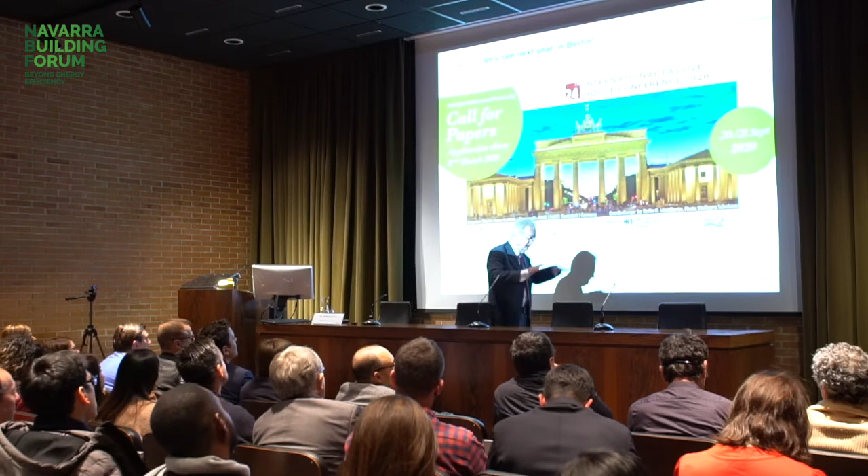The former slide was about the last conference and two of the presentations we had there. I just want to show you the upcoming international conference next year. It will be in Berlin this time, and we have a call for papers now running. Maybe it's quite interesting for some of you from the university here in Navarra, because I have already seen that you are doing a lot of very interesting stuff here, going into circular economy and all these things. That might be quite interesting for a presentation at the conference.

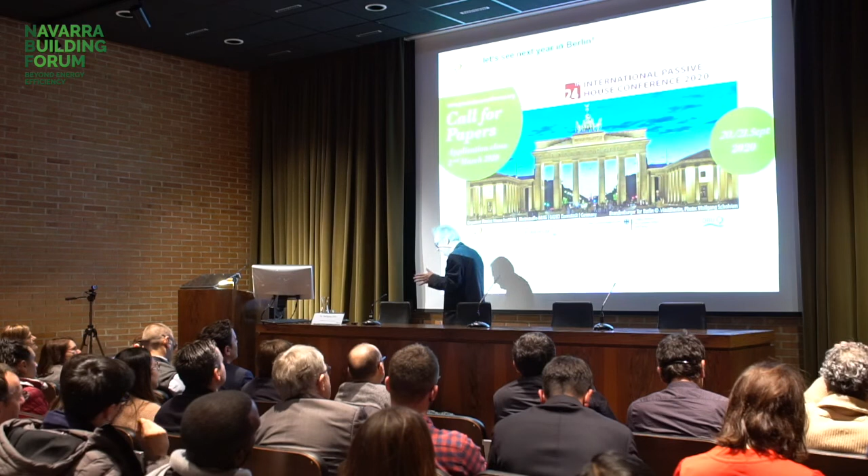Just to give you one hint, what we want to see at that conference are really in-practice monitored solutions. So not just some weird ideas, but really proven concepts of how you can improve efficiency, or how you can apply circular economy, or how you can use renewable energy in a way that will reduce the problem of climate change. So thank you very much, and I'm open for your questions.